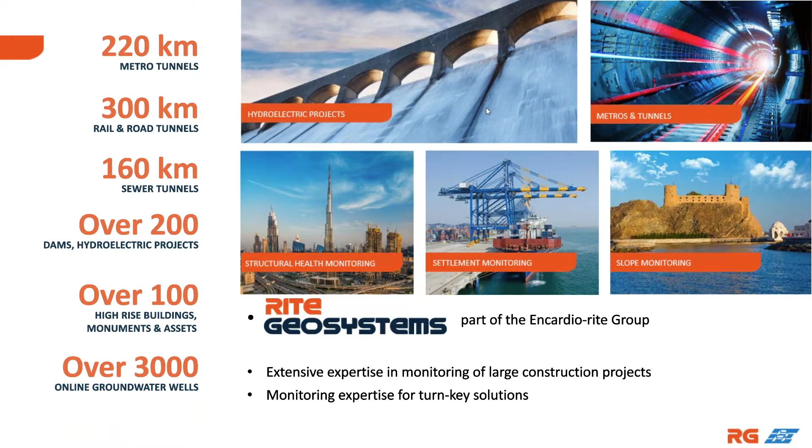So just briefly a little bit more on Encardio-rite. We've actually got some deep heritage here, with over 54 years of experience in the company. We've got a network that we work with of probably 450 professionals and have supplied products into around 55 countries.

The strong part of that, I think, which is worth sharing, is that we have our own research and development department, and we manufacture the vast majority of sensors ourselves. The key there being, of course, is that we can react very quickly to technological changes and indeed to changes in market demand, be they for technology itself or for volume of supply.

As you'd expect, we work to stringent quality systems and international standards, which we currently work to ISO 9001:2015.

So, instruments. Here we'll see just a few of the instruments that are used on the case study project that we're going to talk about. It can occasionally be that with instruments, if one of these sensors gives a reading that wasn't expected, people call into question: is the sensor working? Is that reading correct? Well, we would say with some high confidence that yes, very much. If a sensor gives a reading that wasn't expected or is a little odd in comparison to its trend, investigate it. Why do we say that?

Briefly, with these 2 instruments here, to give you an idea of the testing that goes on before any instrument is supplied and put onto a project. With piezometers for water pressure, we've supplied thousands of these over the last 30 years. We use a technique of electron beam welding, which hermetically seals the sensors, preventing dust and moisture ingress, and makes them highly resistant to corrosion.

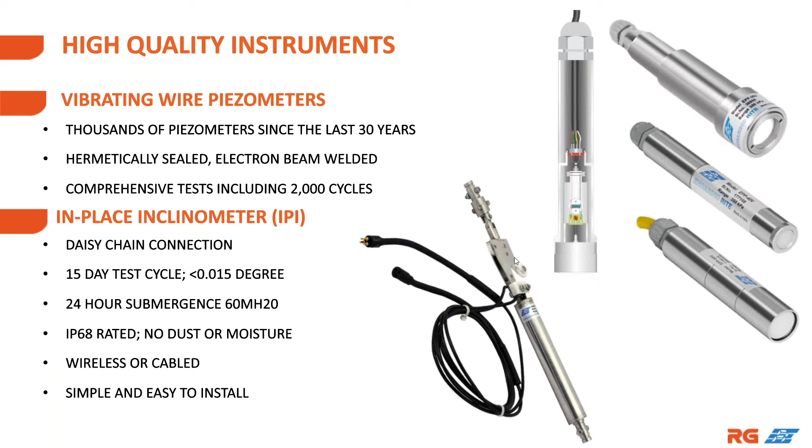A couple of other pieces of instrumentation used on the project we're about to see. Here we have a digital inclinometer, the manual version where the probe is lowered down the access tube and readings are taken manually. These systems haven't really changed over the last 20 to 25 years, other than the readout unit being much smaller.

It's very powerful now with the software you use on it. Essentially on your mobile phone, you can run this software, and it allows you to check historical data over days, weeks, or months. You can transfer that data to and from site whilst on site, with no need to leave and gain access to readings.

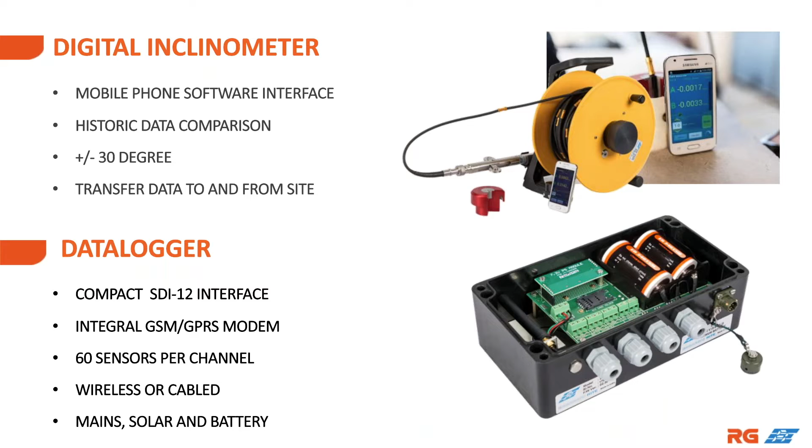Data loggers are extremely compact now, with integral GSM, GPRS modems built in. 60 sensors per channel can be handled by the data logger, so a 3-channel data logger can handle 180 sensors. It can also handle a variety of sensors. On the case study we're about to see, it's quite easy to put in vibrating wire sensors, be they piezometers, strain gauges, and a mix of IPI sensors if installed. Power options, depending on where you are in the world, you may wish to use mains, solar and battery, or a mixture of those, such as internal batteries backed up by solar.

Another option is automatic robotic total stations. These are particularly useful where it's hard to access site to get back to the same location to take readings, or if there are a high number of sensors or targets to be monitored. It also allows you to send data wirelessly, and you can connect to it remotely from anywhere, reconfigure it, set it, etc. This is an increasingly popular piece of equipment when high numbers of sensors or targets need to be monitored remotely or in hard to access places. We've used something similar on another project, not shown today.

In that case, readings had to be taken every 15 minutes, and the data had to be made available to a client within 20 minutes. It's been running for some 3 years, and you have about 9 million data points.

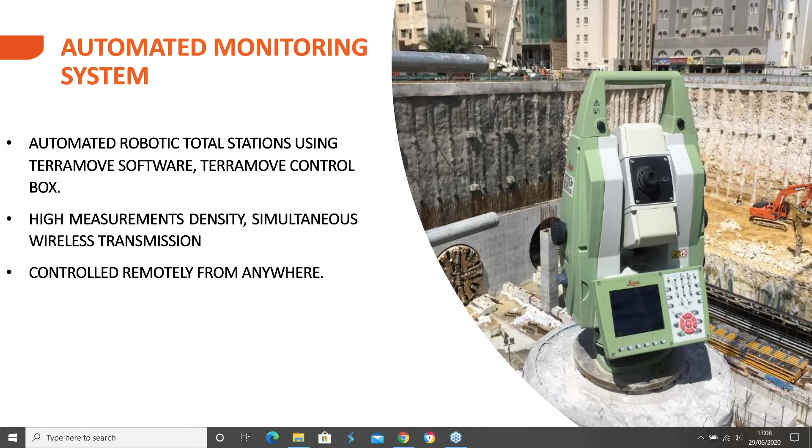9 million data points takes us quite nicely to talking about data management. I think it's as important to consider data management as it is to consider what type of sensors you're putting onto the project. Data management now is hugely versatile with high amounts of functionality. You can set a hierarchy of permissions, so a tier 1 level of people can see the data. If they don't react to it, or if something hits a certain threshold and somebody else needs to see it, you can escalate it. It's completely versatile, and a typical interface is shown here.

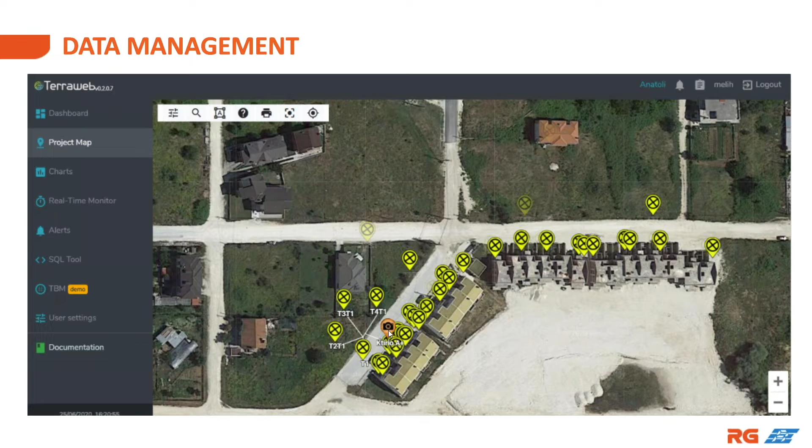Similarly, there's a small icon of a camera, and you can take an image snapshot of each location where the sensors are. That can be particularly useful if you have, for example, two sensors on one building wall, one high and one low, and you need a short reminder as to which sensor is which when looking at the data.

You can look at real-time data for each of these sensors as well. You just click on one individual sensor, or you can highlight a set of sensors and create charts for those sensors. Contour plots, perhaps if it's piezometric data, you can plot contours, and you can show animated displacement.

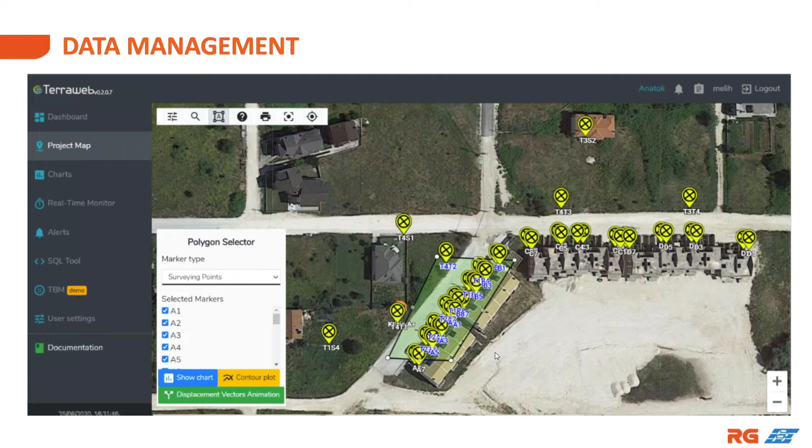A typical graph shows several sensors over a longer period of time. Again, the versatility allows you to drill into each sensor, click on a certain date, and see all of the readings, whether graphical or numerical.

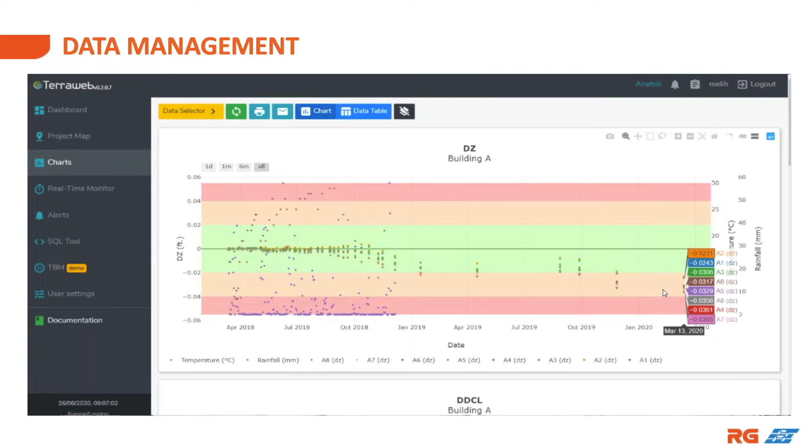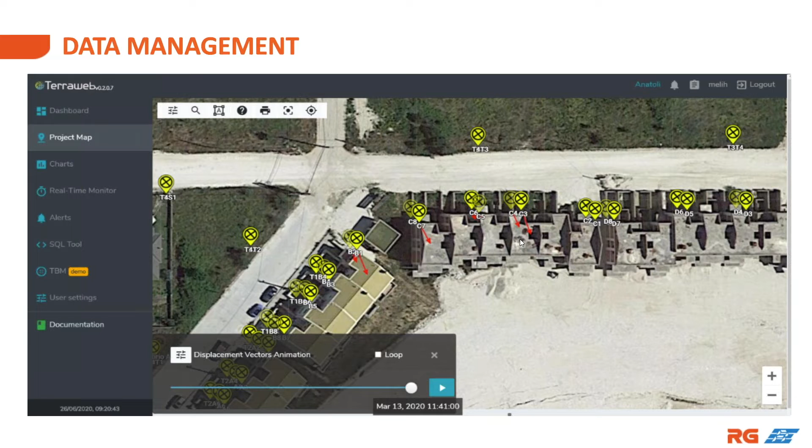The animation feature I mentioned is shown here. I'm not running this as a live animation, but in short, for each sensor you can see red arrows, and these depict the direction of movement of the sensor, with the length of the arrow depicting the amount of movement. If run as an animation, you would see these sensors showing arrows created in particular directions and certain lengths. Data management is as important as sensors, hugely versatile and with a lot of functionality.

A typical instrumentation scheme, for the project we're looking at in just a moment, is deep excavation and tunneling. Instrumentation is determined by designers as to what will go on site, and designers have to take into account methods of construction, what is being constructed, the ground, the stratigraphy, budgets, the risks that could be involved, and the consequences if those risks were to occur.

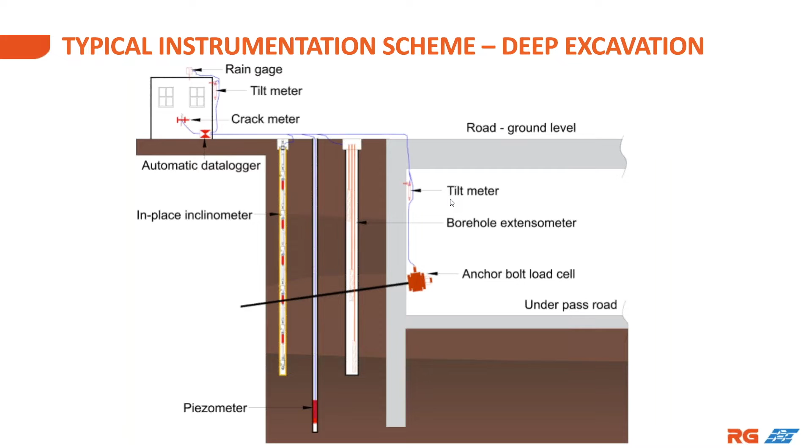The amount of instrumentation used on any project is determined by several factors. On this slide, the instruments we've just seen are depicted on the left-hand side. The part clients are really interested in is data, access to data and visibility of data, not to see 9 million data points, but to see the exceptions and the reports. Within data management, it's possible to create auto reports sent out weekly, which just show the key factors required to be seen.

In between data being received and the sensors themselves, we have data loggers, automatic robotic stations, cellular phone networks, wireless nodes, etc. Depending on cabled or wireless, it will largely be about topography, line of sight, and possibly permissions in certain regions as to what is allowed to be used.

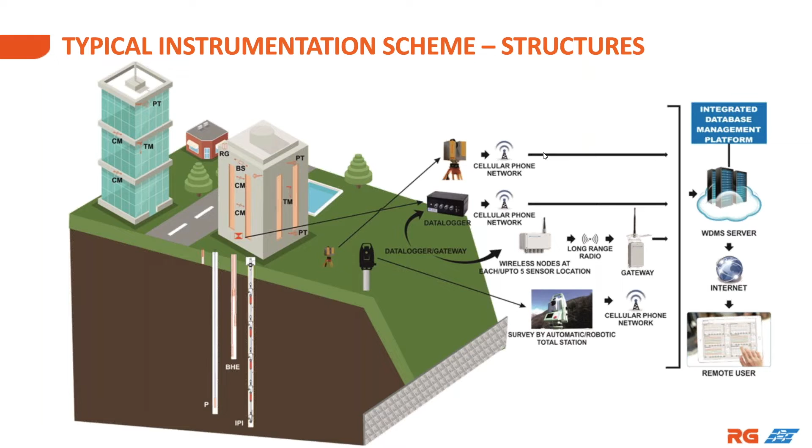Moving on to the case study itself, we see even in this day and age there still are, unfortunately, catastrophic events on some projects where slips occur or structures fail. I'm glad to say that this case study does not cover any of those catastrophic events or have a catastrophic event associated with it. But it is important to monitor and take note of what happens.

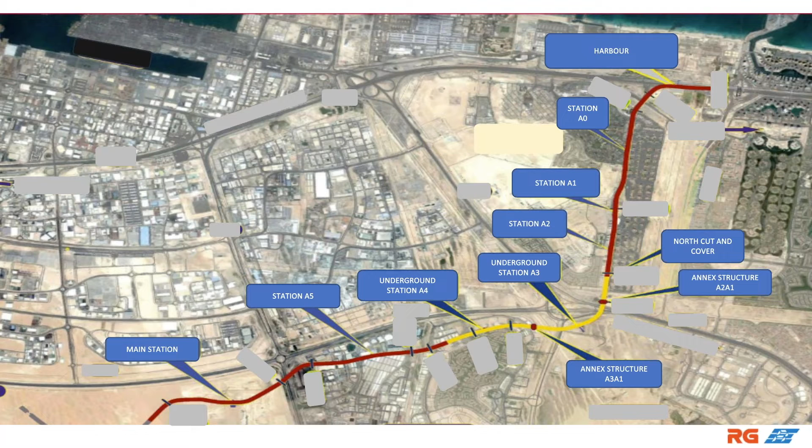Before any construction took place on this project, we were asked to carry out a dilapidation survey. This consisted of using a drone to fly along the route, taking note of anything within 25 metres of the construction line, recording manholes, lampposts, buildings, structures, etc., to get essentially a base set of visual data, so that it can be looked at again later to see if anything has been affected by construction.

A summary of those structural details: from the north, cut and cover, a tunnel boring machine went through to carry out the excavation for the tunnel, moving through to station A3, and then from A3 through to A4 and onto south cut and cover.

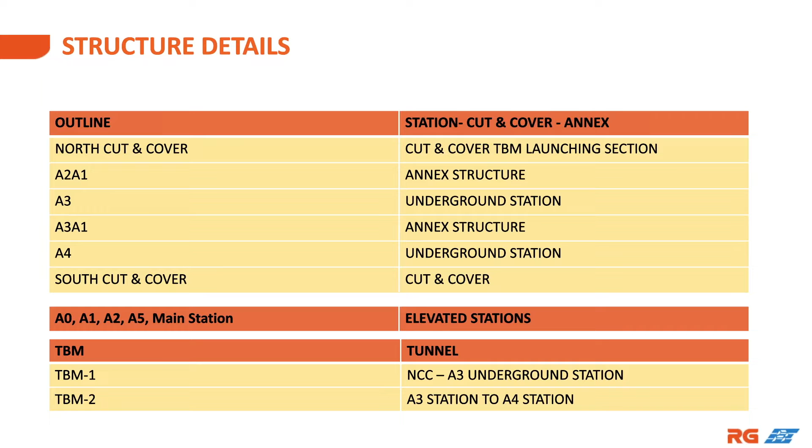The monitoring frequency for this project, here's a summary. During excavation, the majority of instruments were monitored at least daily. Some strain gauges and water level recorders were at 30 and 60 minutes, but the vertical inclinometers, critical in regard to excavation and depth of excavation, were monitored twice daily.

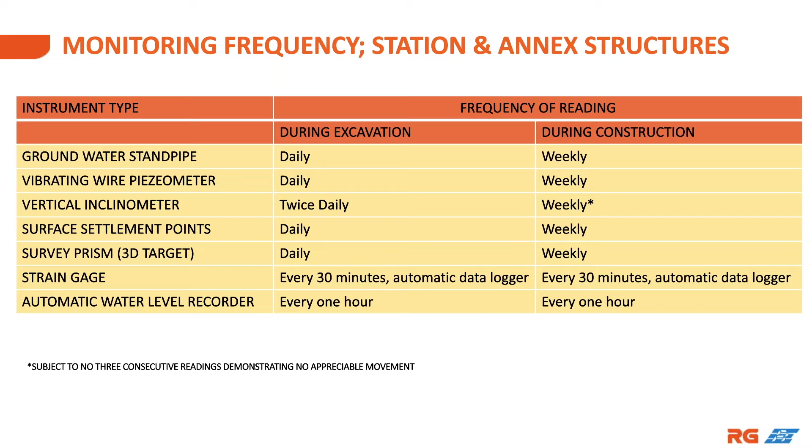During construction, that frequency reduced, moving more typically to weekly readings, although the automated readings were still done every 30 or 60 minutes. There's a caveat that with the inclinometers, there had to be no appreciable movement over 3 consecutive sets of readings, or if that did occur, it would have reverted back to a more frequent monitoring regime.

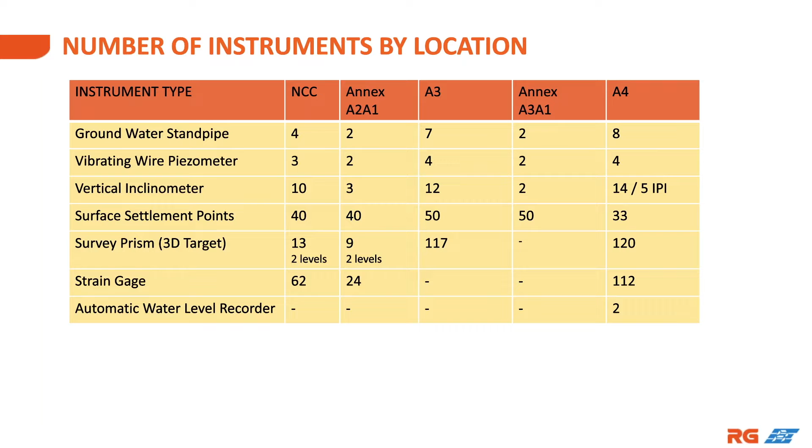Number of instruments by location through the tunnel section shows a fairly healthy amount of instruments: piezometers and standpipes for groundwater monitoring, vertical inclinometers for excavation. On A4, one of the inclinometers was retrofitted with some in-place inclinometers. We've also got surface settlement points and prisms, which we use to cross-correlate for displacement and 3D movement.

So we mentioned previously that one of the factors in terms of determining what is monitored and what is used is the risk on a project.

Now, just at this point, I will move over to my colleague Melih, who can take us from this point.

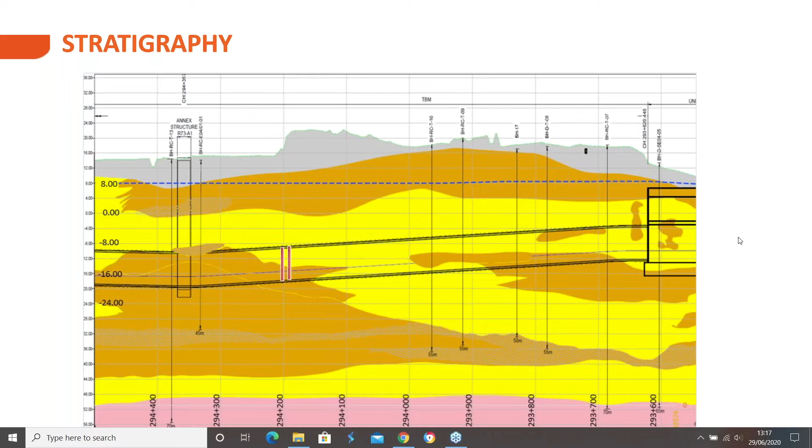So, as Steve mentioned, there were several sections of the project which we're going to go through to understand the overall structure and the instrumentation layout that was implemented. The first one is the north cut and cover section, where the TBM was launched.

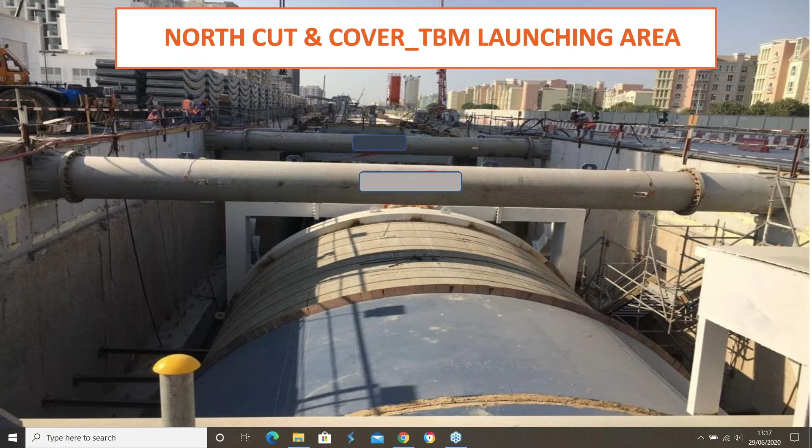This is the overall layout for this section, and this is the general schema of the instrumentation layout for most of the project. There were 4 main components targeted for monitoring: the movement within the retaining structures, the lateral deflection of the retaining structures; the movement of the ground surface, as well as settlement of the third-party structures in the zone of influence; and the groundwater change around these structures in the excavation area.

As you can see, a number of vibrating wire piezometer monitoring wells, as well as open standpipe groundwater wells, were installed. Within the launching area there were struts monitored for stress, as well as vertical inclinometers for the deflection of the diaphragm wall.

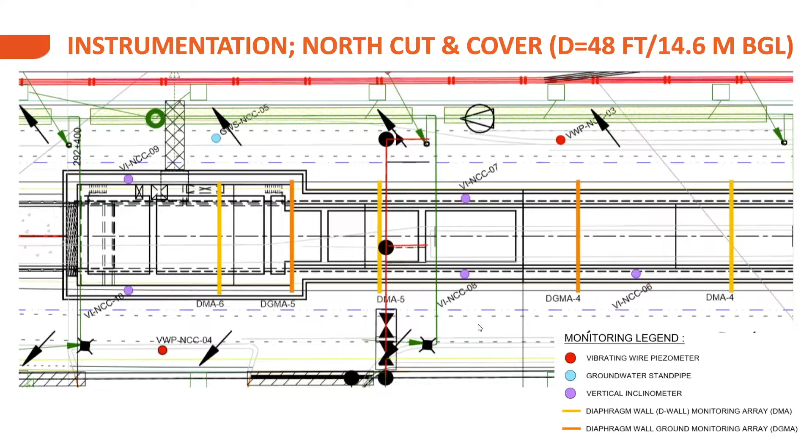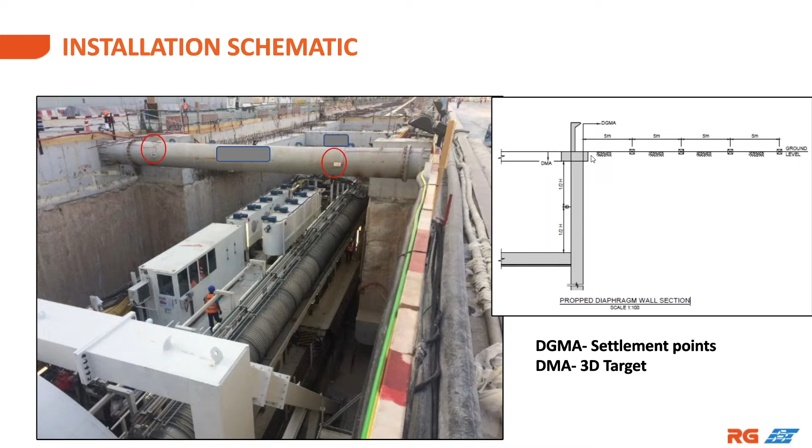So this is a picture from the site. You can see the strain gauges installed on the struts over the TBM, and you can see the extent of ground monitoring outside the diaphragm wall.

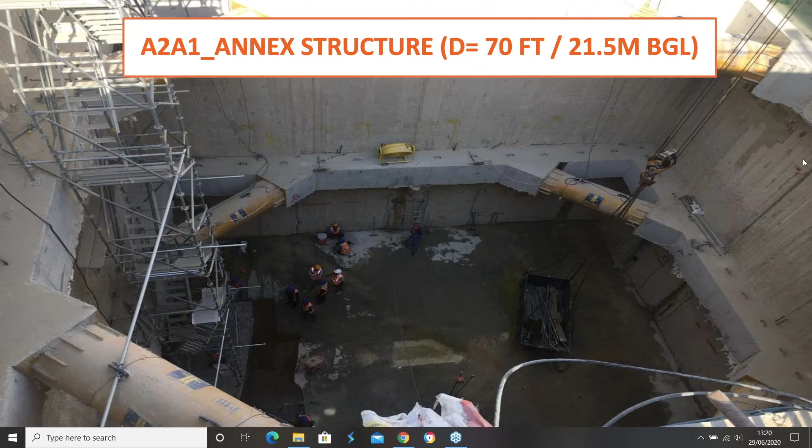The second structure that is monitored is these ANNEX structures. There are 2 ANNEX structures. These are underground structures that were built as an emergency and maintenance access to the tunnels during operation. So these are not stations, but basically vertical shafts to the tunnel, to maintain that access for emergency and maintenance purposes.

This is one of the layouts of the A2A1 annex structure. As you can see, struts are monitored for stress with multiple vibrating wire strain gauges, as well as the ground surface monitored in 3D with prisms.

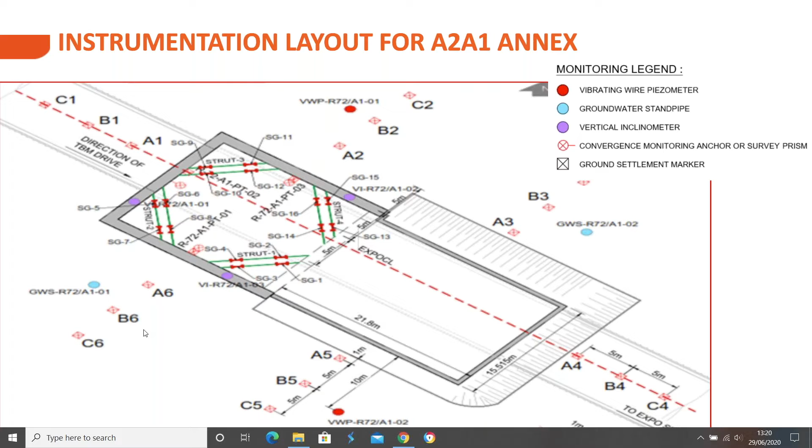Similarly, there are inclinometers and piezometer monitoring wells with vibrating wire piezometers.

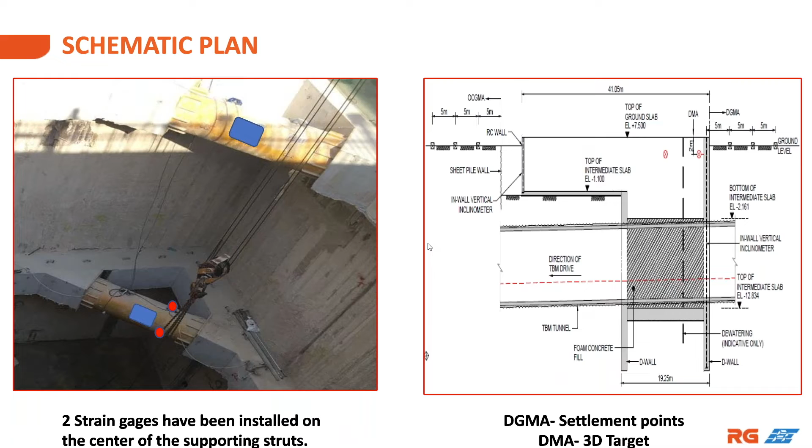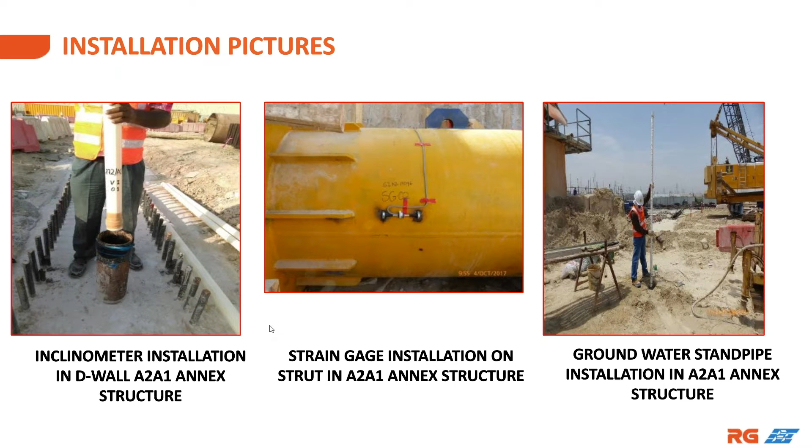This is another picture from Annex 1 where the strain gauges are installed, as well as a section showing how it merged with the tunnel alignment, as well as convergence monitoring. And other installation pictures, as you can see, the inclinometer is installed within the diaphragm wall, along with some other installation pictures.

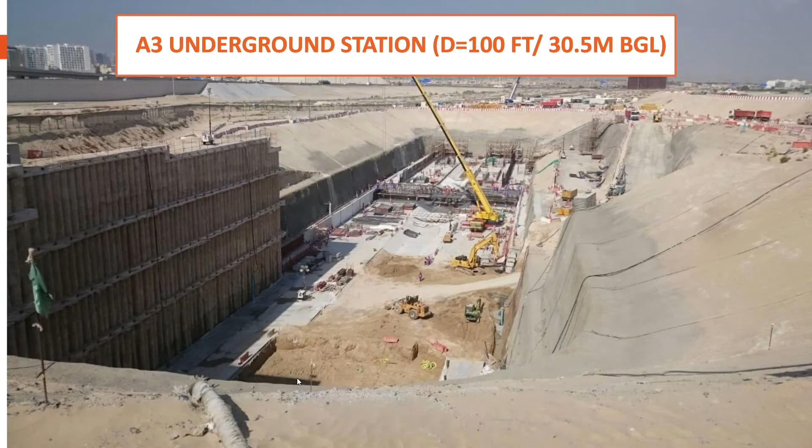This is the first underground station, called A3. It's a really wide open excavation area, supported with diaphragm walls. This is the overall plan and where the instrumentation has been placed.

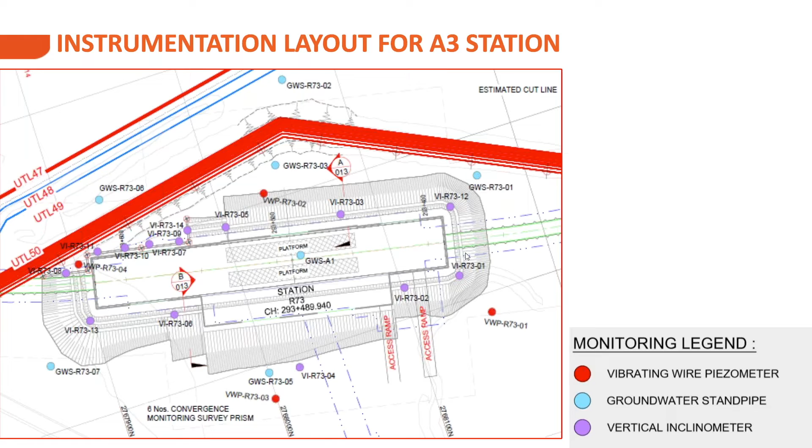So as Steve mentioned, the geology here is a little unique in a sense that the rock is weak, but it can support itself with apparent strength. But you have to be very careful with the overall design, because there are interbeds, and the overall homogeneity varies from one location to another, which makes it difficult to predict the engineering parameters.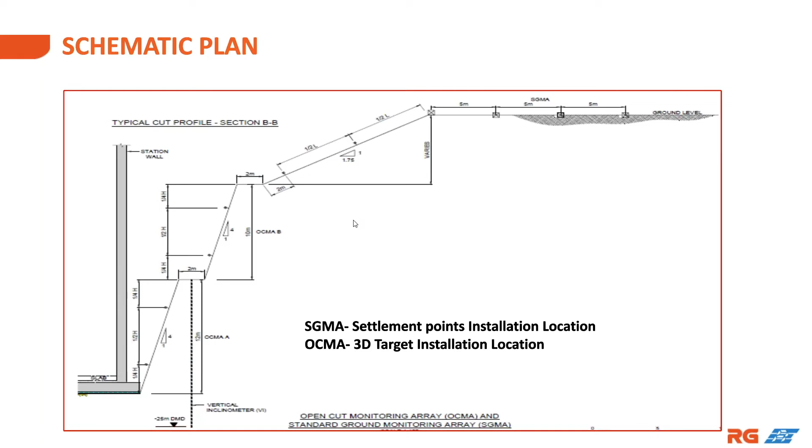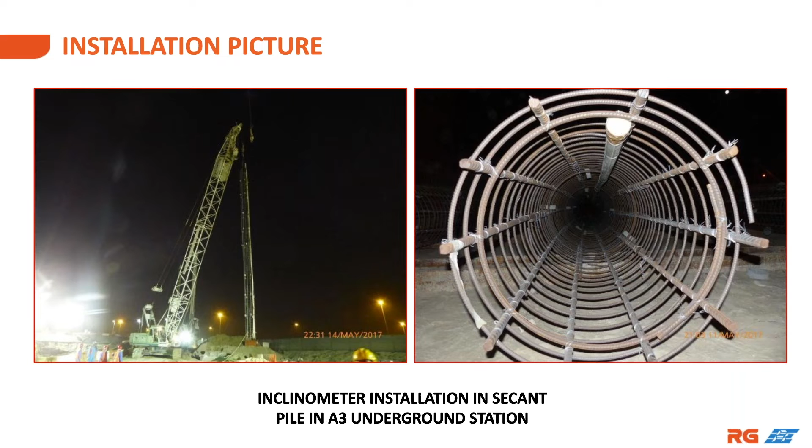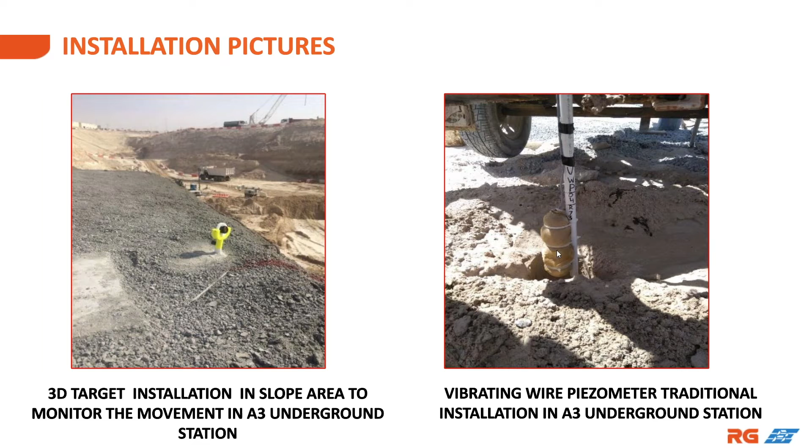Again, I'd like to show some of our installation pictures. These are the inclinometer casings placed in the secant piles, which comprise the diaphragm wall, and some 3D prisms for 3D monitoring, as well as piezometers that are placed into bentonite peg as a traditional method.

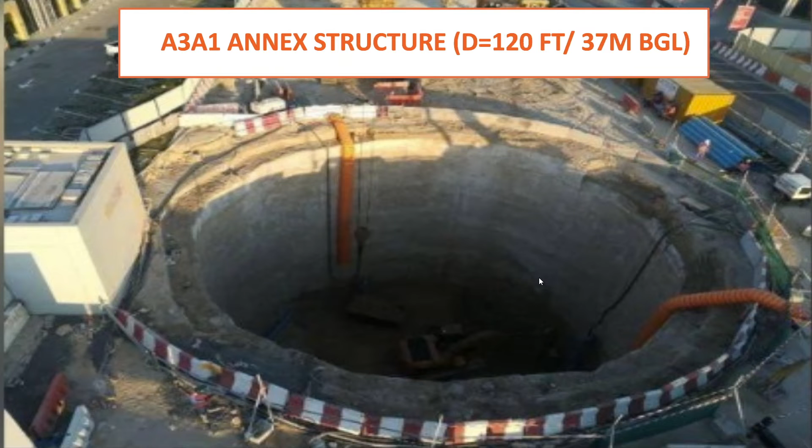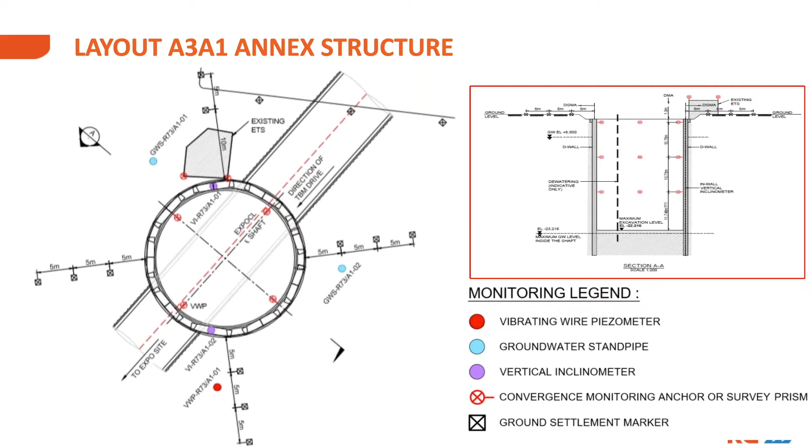This is another annex structure that was instrumented. Again, it's a shaft through the tunnel, and this one is vertical. Convergence has been monitored using prisms and total stations, as well as inclinometers, and various piezometers have been used during the excavation.

And the rest of my talk is going to be on this last underground station, which is a large opening, and significant effort has been put into the integrity and safety of the overall excavation process.

So this is a large station, as you can see, with various instrumentation in place, heavily on the inclinometer, piezometer, and surface monitoring side, as well as monitoring the stresses on the supporting struts.

One thing I would like to mention here is that from this point forward, the majority of my focus is going to be on the east side of this excavation. This is called the head wall, where the TBM breaks through the excavation. I'm going to talk about the results from these inclinometers, 19, inclinometer 3 and 5 and 2.

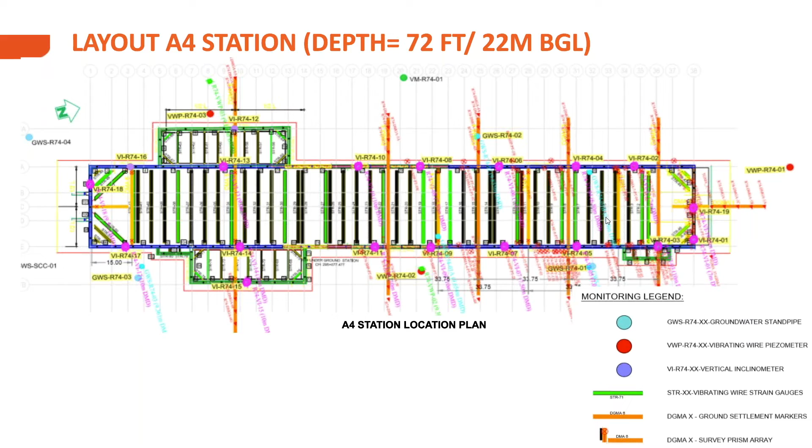Again, similar pictures from the site, strain gauges installed over the struts.

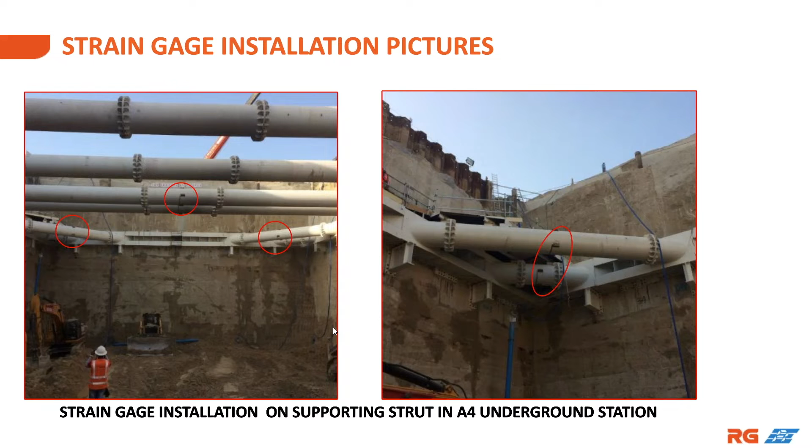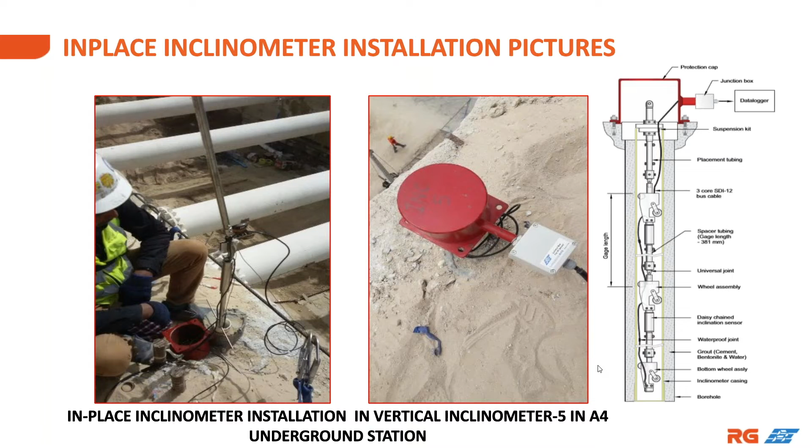And an in-place inclinometer picture that's installed after the initial deformations to increase the level of intensity and monitoring of the deformation. As you know, in-place inclinometers are very handy tools, giving you near real-time monitoring of the deflection at the location.

Before looking at the results, I want to give an introduction about the triggering levels implemented at the site, which were coded as green, amber, and red, all of which were experienced. Basically, green is almost a design level limit, where everything should be within the design allowance, and red being the serviceability limits, the maximum deformation that the designer thinks the structure can handle. Amber is usually a percentage of the red serviceability limit.

Within the amber zone, usually the contractor and designer get together and look at what is going on, since the green and amber limits have been exceeded, and they do back analysis and take measures to prevent getting into a red zone. If a red level has been exceeded, it usually brings a stop work order after carefully evaluating the situation and the imminent danger and risk.

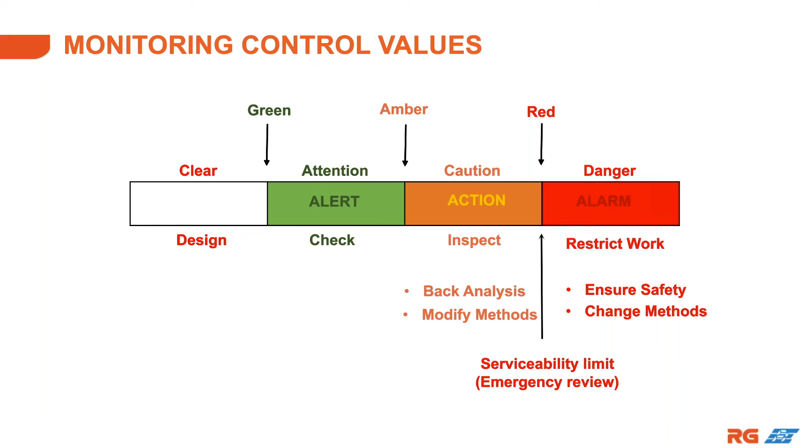Let's look at some results from the site. The overall excavation started and toward the mid of April 2018, and shortly after, some extensive deformation has been observed at inclinometer 3, exceeding the green levels, which is a surprise at that level.

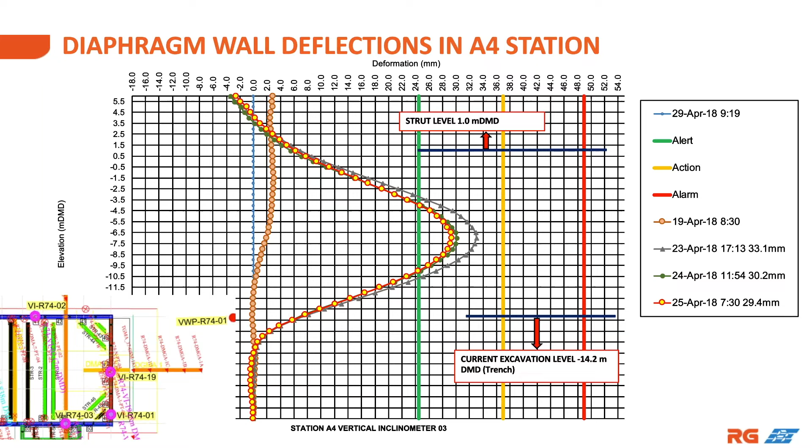Continuing within April, toward the end of April, as the excavation moves forward, a significant number of inclinometers have shown deformation readings.

At that stage, one important thing to know is almost no dewatering system is in place outside of the excavation area. Also keep in mind, due to the proximity of the structures around these excavation areas, dewatering is a tricky undertaking, because you don't want to really alter the groundwater under the structures around the excavation, but you also want to keep your excavation safe. So it's a very delicate balance for the overall performance of the project.

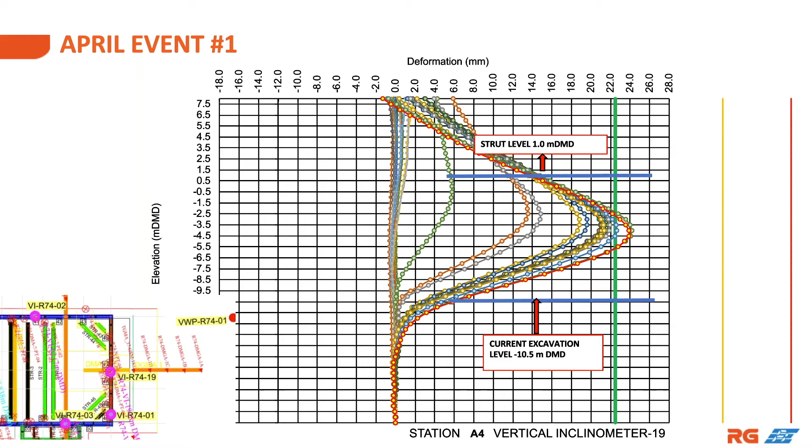And, again, sorry about my slides.

So again, after observing the initial deformations, toward the end of April, we have seen again significant deformations exceeding the amber trigger level, which is an eye opener, and which led the contractor to immediately install dewatering wells.

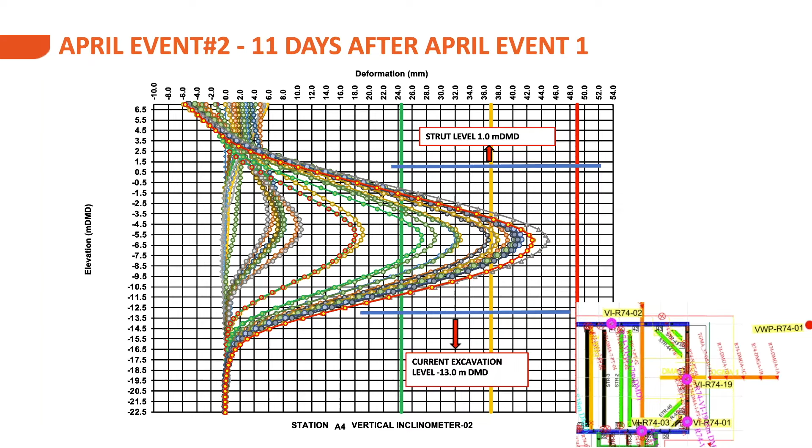At this point, one thing to keep in mind is that the slurry wall in the head wall area hadn't been installed yet while the excavations were ongoing.

In the first couple days of May, the very east side of the excavation reached the red trigger level. This was due to a couple hours of malfunctioning and failure of the dewatering well, and the groundwater levels rose around 2 meters, causing the deformation behind the excavation area.

So this was the first eye opener and showed the importance of the overall dewatering performance at the site.

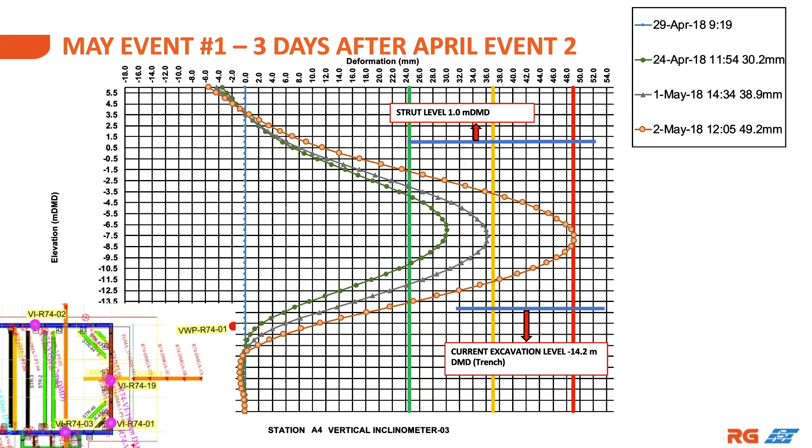Couple days later, this is another view of that event on May 1st, at another location on the other side of the wall.

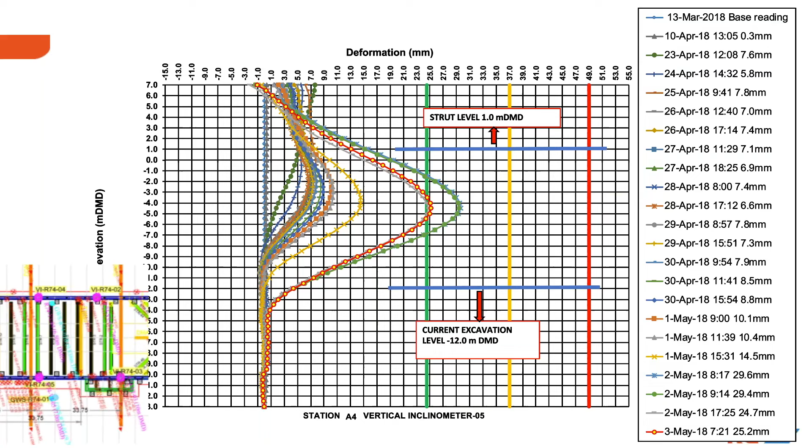A couple days after, the dewatering system again kind of failed and shut down, and the deformations again exceeded the red levels. This was again for a couple of hours, and the groundwater levels rose 1.5 meters, showing the deformations there. Thankfully this doesn't really cause any catastrophic failure, but it really tested the limits of the diaphragm wall at the site and showed the importance of the dewatering operations.

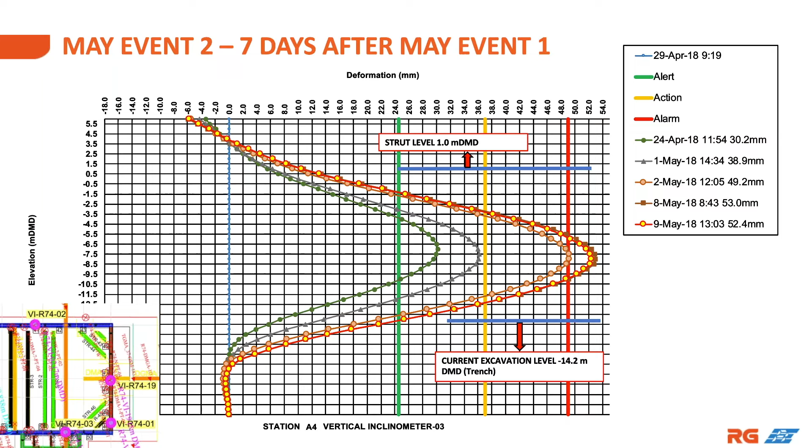Similarly, this is from another inclinometer confirming the same type of deformation.

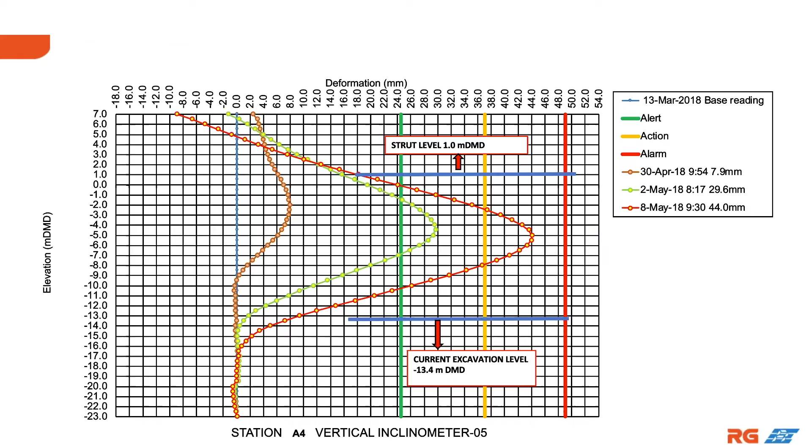Of course, as instrumentation companies, we always preach about the importance of redundancy at the site. Typically when you observe such high deformations at the site, you always question the data, and if the data is coming from one set of readings, it may still be questionable whether it's reliable or not. So at the site, since there's redundancy on deformation, these inclinometer readings have been confirmed thoroughly.

These readings have been confirmed with the deflections on the wall, which are measured using automated total station ATS and 3D prism targets. You can see the deformation scheme on the dates, by April 19th, April 22nd, beginning of May 1st, and May 8th, which is the last failure of the dewatering well. So it was really confirmatory of the other readings.

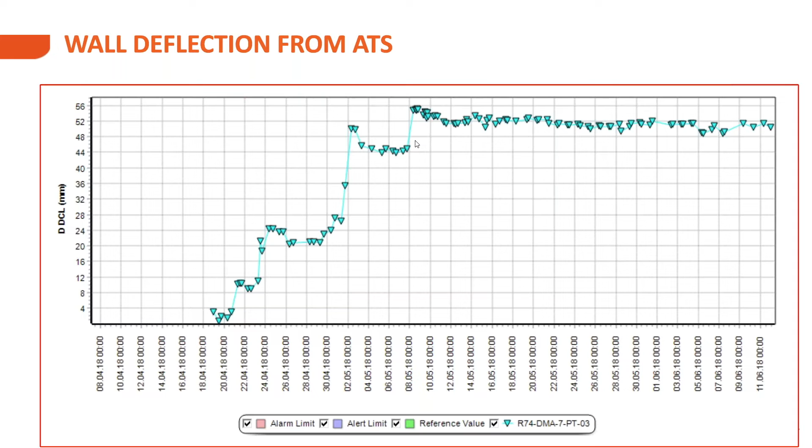So redundancy is the key for overall confidence in the project and the data.

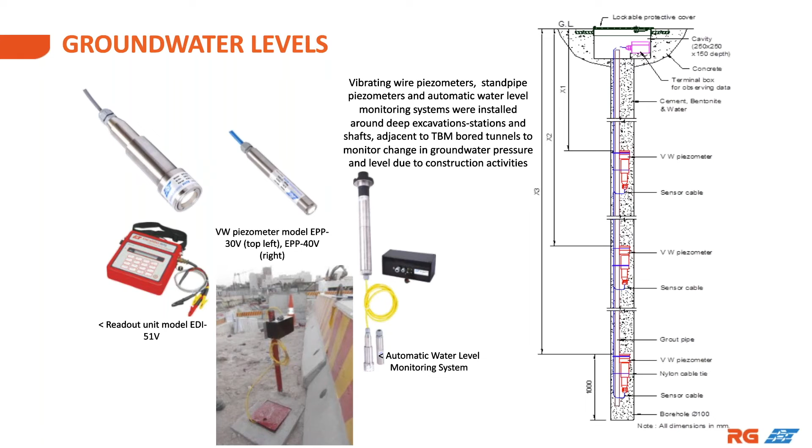For groundwater levels, one thing we like to use as a company is a fully grouted method, meaning the vibrating wire piezometers, in a multiple fashion, so in a single hole we can place multiple piezometers to measure levels at various depths, and we fully grout the piezometer. Sometimes this is counterintuitive - how could a grouted piezometer give reliable readings? But because of the high sensitivity and precision of the vibrating wire piezometers, the overall volume change required to be captured is really minimal. And due to the ease of installation, we really promote the fully grouted method.

At this site, we actually had the chance to compare the traditional bentonite-packed monitoring wells and piezometers with the fully grouted piezometers. As you can see, the data is highly comparable, which gives us confidence in the fully grouted method.

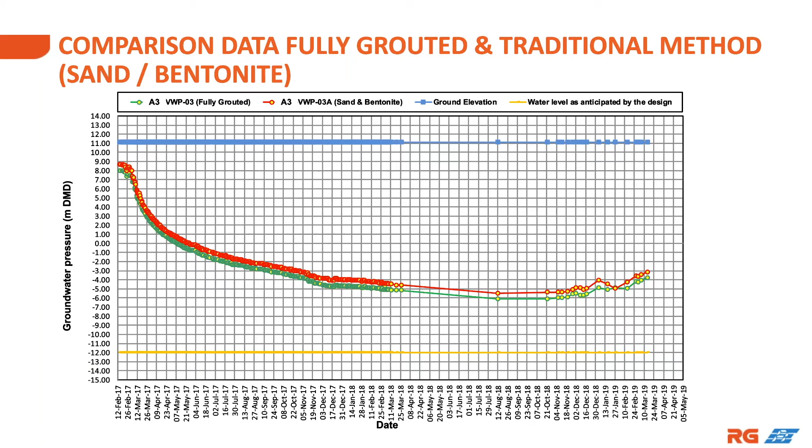Of course, this particular application depends on the compatibility of the grout versus the overall geology. It's not an off-the-shelf solution - you have to be very careful designing your grout mix.

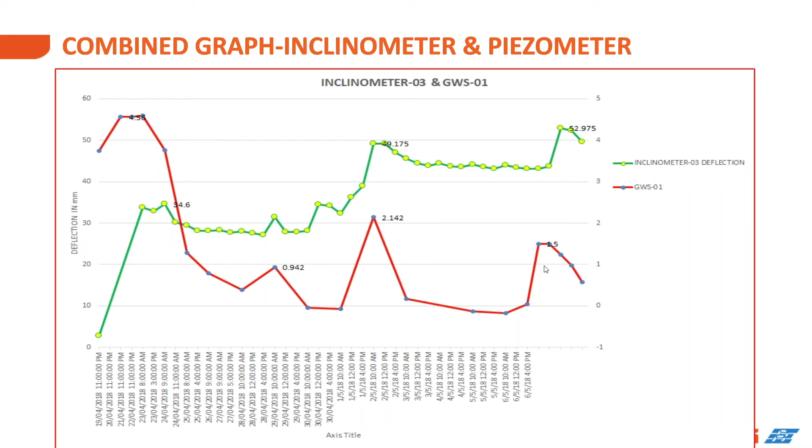One thing I want to mention at this webinar is the overall importance of groundwater monitoring at any site. As you can see here, the red lines show the groundwater levels, and the green lines show the inclinometer readings at the most deflected inclinometer. There's a distance between each of these sensors, but as you can see, whenever there's an increase in groundwater, there's an increase in deflection of the wall. Usually the groundwater is a pre-indicator of deflection. If we can closely monitor the groundwater levels, we can really predict the overall outcome and eliminate further deflections at the site.

Another result is the strain gauge data, which shows the overall stress and load on the struts. We have multiple data points, but just from one location near inclinometer 3, you can also get the increase in load levels in the strain gauges on those struts at various deformation events - late April, beginning of May, and around the 8th of May. All those deformation events were captured with the strain gauge data.

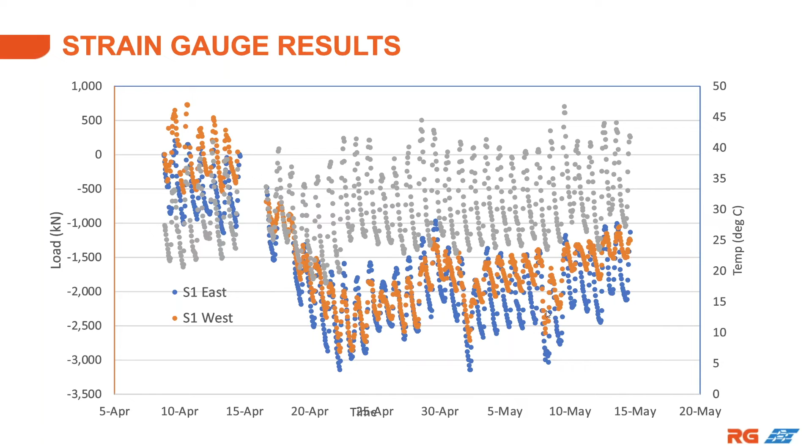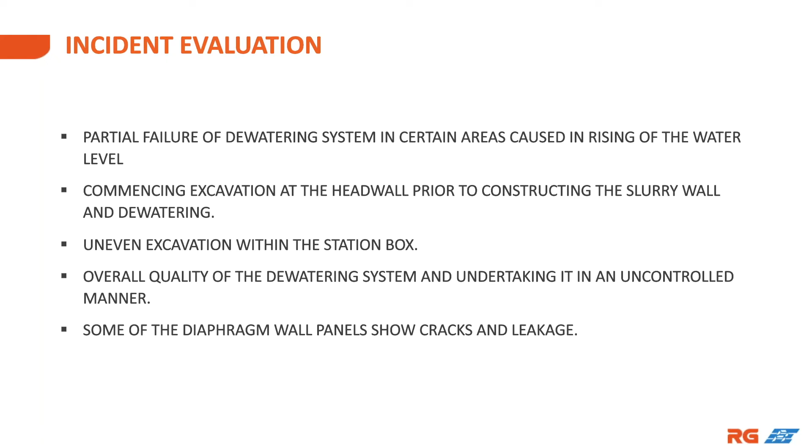At the end, I think we can get some outcomes from this project in terms of what is important and how we should treat the overall measures and understanding of these deformations. Is partial or full failure of the dewatering system the main cause of these deformations, or a lack of dewatering? There are a couple other reasons that can be carefully evaluated as the cause behind these large deformations - the lack of slurry in the head wall, sometimes uneven excavation within the station box, and the quality of the dewatering system and the diaphragm wall is also really important.

So the contractor and designer increased real-time monitoring after the initial deformation. We put in-place inclinometers and real-time piezometer readings around the diaphragm wall, increased the water level measurements, and added additional automated total station 3D prisms for ground deformation monitoring. We also increased the intervals of monitoring, as well as adding dewatering wells and some temporary support structures.